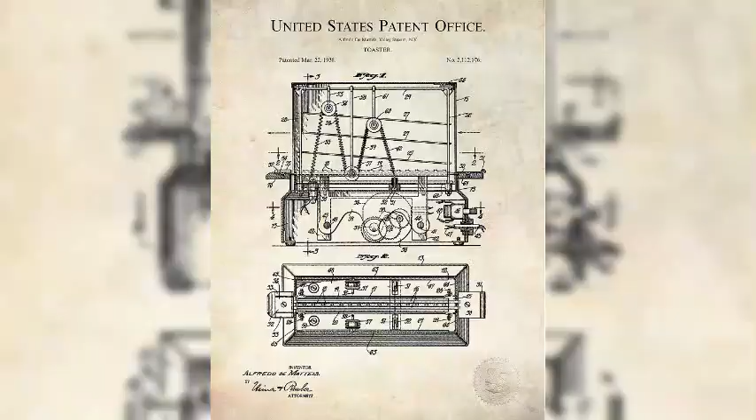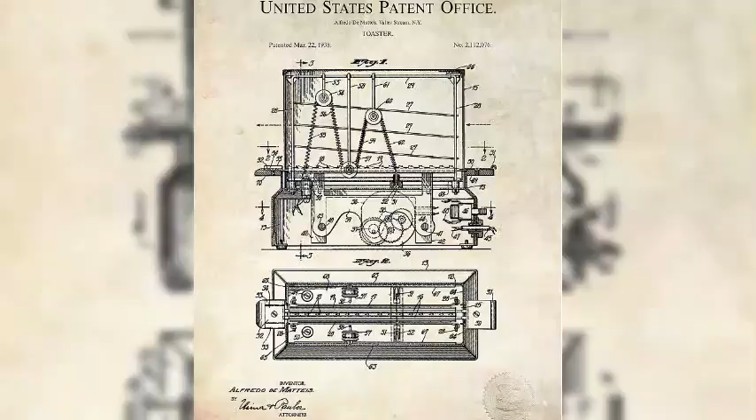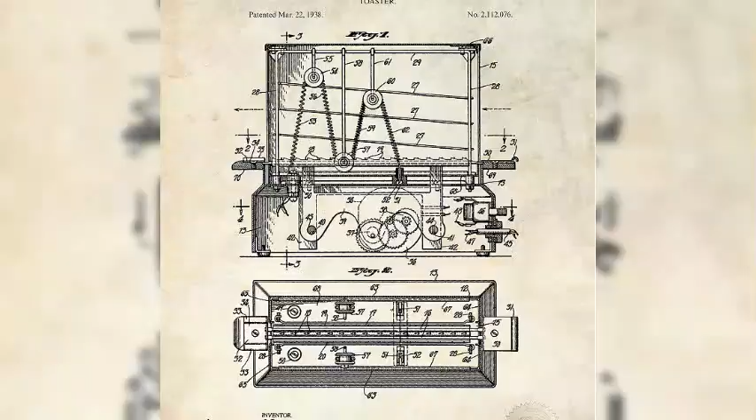The breakthrough came from a Sunbeam engineer named Ludwig J. Koci. Working in 1948, Koci was wrestling with the oldest problem in toasting. Every automatic toaster of the era worked on a timer, a little clockwork mechanism pioneered decades earlier that simply counted out a fixed number of seconds and then ejected the bread. The trouble is that a timer doesn't actually know anything about your toast. It doesn't know if the bread is thick or thin, fresh or stale, white or whole wheat, and worst of all, it doesn't know how hot the toaster already is. Koci's idea was to throw the timer out entirely and let the toaster do something radical: watch the bread.

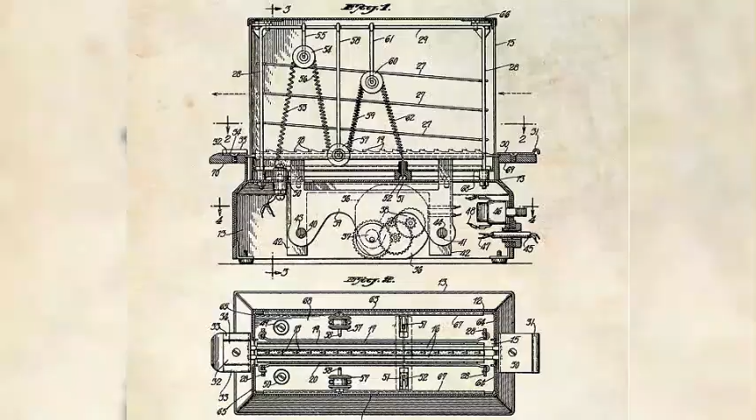On January 18, 1949, Sunbeam was granted his patents, one for a radiation thermostat control for a toaster, one for the toaster's control mechanism. The streamlined chrome body that would house it was shaped by the industrial designer Robert Davol Budlong, the same man who styled some of the era's iconic radios. Koci had not just designed a toaster, he had taught a toaster to perceive.

It's worth slowing down on why Koci's idea was so clever, because it's the whole secret. Every cheap toaster, including the one you probably own, is essentially guessing. It runs the heating elements for a set time or until a single internal sensor heats up and then it quits. It is timing the toaster. It is not measuring the toast. Koci's toaster measured the toast.

Inside, a bimetallic strip, two metals bonded together that bent predictably when heated, sat near the bread and read the radiant heat coming off the bread's surface as it browned. When the bread itself reached the exact temperature that corresponds to your chosen shade of golden brown, the strip bent just enough to trip the mechanism and lift the toast. The darkness control did something beautifully simple. It just moved that sensing strip slightly closer to or farther away from the bread. No guessing, no timing. The toaster responded to reality, to the actual condition of the actual bread, which is exactly why it never got it wrong.

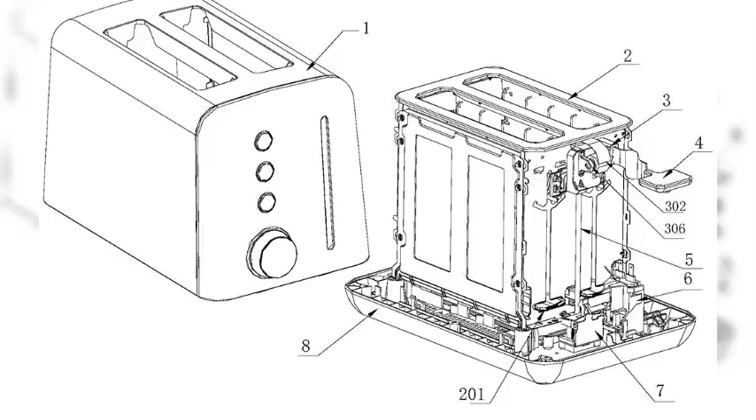Now look at everything Sunbeam managed to leave out of this machine, because that's where the engineering becomes almost unbelievable. There is no electric motor lowering the bread. The bread descends purely on its own weight, through a system of carefully tensioned cantilevers and levers, tuned so precisely that two slices sink at a slow, graceful, controlled rate. The machine harvests the energy of you simply setting the bread down.

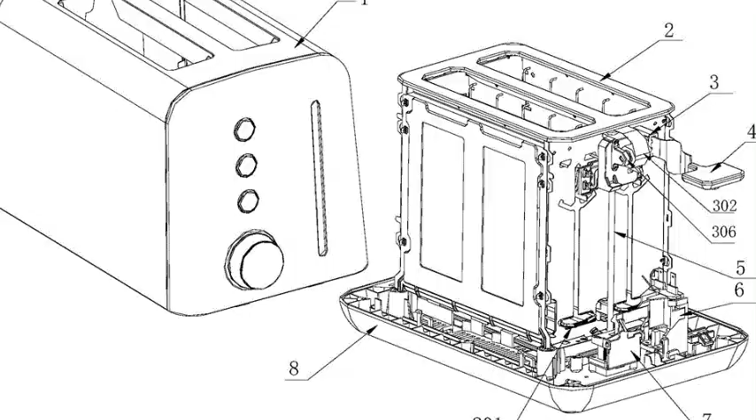There is no computer, no circuit board, no microchip, no electromagnet holding the carriage down, the failure-prone part that kills most modern toasters. No clockwork timer to wear out. The entire intelligence of the device is mechanical and thermal. Levers, springs, and a strip of metal that bends in the heat. That's why it lasts. There is almost nothing in it that can fail, and what can fail, a cord, a screw, a spring, can be fixed at a kitchen table with hand tools. People routinely take 70-year-old units, replace a frayed cord, and put them right back into daily service.

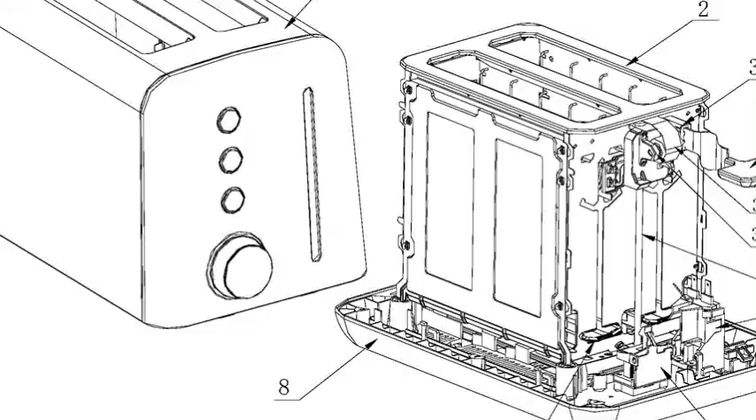A 1949 buyer paid around $25 for this, a serious sum at the time, the equivalent of several hundred dollars today. But they were buying a machine engineered to be repaired and used for half a century, and it delivered.

Here is the detail that makes people genuinely angry at their own kitchen, and it's worth letting it land. Think about what your toaster does on a busy morning. The first slice comes out fine, but the second batch, it comes out darker, sometimes much darker, even though you didn't touch the dial. Why?

Because your toaster runs on a timer, and after the first round, the whole machine is already hot. The timer counts out the same seconds, but the bread cooks faster in the preheated toaster, so your timer-based toaster systematically burns the later slices. The 1949 Sunbeam does not have this problem. It cannot have this problem because it isn't counting seconds, it's reading the bread.

A hot toaster, a cold toaster, the first slice or the 15th, it doesn't matter. The sensor only releases when the bread reaches the right doneness. Full stop. So a toaster designed before color television solved a problem that a modern $300 toaster still gets wrong today. That's not nostalgia. That's an indictment.

If you're old enough, there's a good chance you've already pictured one of these. Maybe it was on your grandmother's counter, chrome gone slightly cloudy, with the faint ghost of a melted Wonder Bread bag fused to one side. Maybe your grandfather is still using his. There are people whose family toaster has run every morning since 1961 and has never once been replaced.

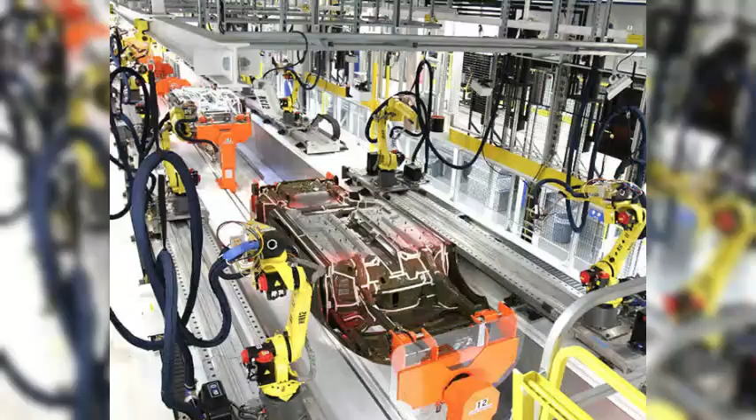Put yourself in the shoes of an executive at an appliance company in the 1960s, looking at the Sunbeam Radiant Control, and you start to see the trap. This toaster is a masterpiece. It also happens to be a financial nightmare for the people who make toasters.

Think about the math. If your toaster lasts 50 years, then you sell one toaster to a household roughly once every half century. The customer is delighted, but your factory needs to sell toasters every year forever to stay in business. A product that never breaks is a product that never needs replacing, and a customer who never comes back. On top of that, this particular toaster was expensive to build. All those precision levers, that hand-tuned mechanism, the heavy chrome. It costs far more to manufacture than a simple spring and timer pop-up.

So the industry faced a quiet, fundamental choice. You could build the best toaster possible and sell each customer one in their lifetime, or you could build a cheap toaster that breaks and sell that same customer a new one every few years forever. You already know which one they chose. The shift didn't come with an announcement. It came as 1,000 small decisions, all pointing the same direction: down. Manufacturers moved toward the cheapest possible way to brown bread. Out went the radiant sensor that read the actual toast.